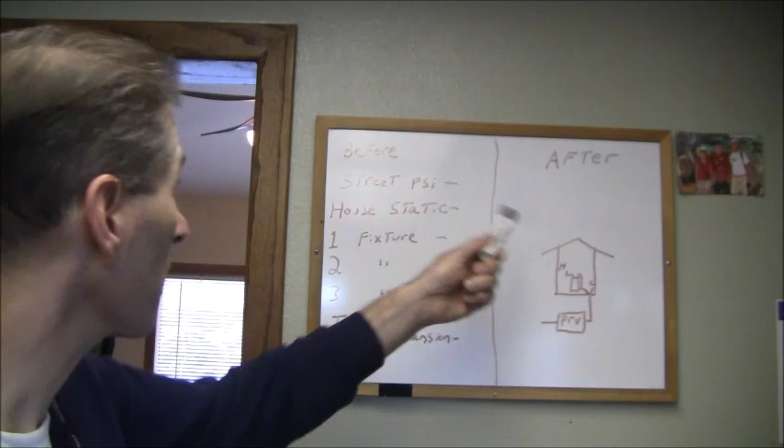Let me write this down. I'm going to do a board example here and go over the numbers. From the street, let's say this is 110 psi, and after that, going into the house, let's put in 50 psi for our example. So it's going to knock it down about half. The pressure reducing valve is going to knock it down about half.

So that's the first job of the pressure reducing valve - to knock down the pressure from the street pressure to what you want your house pressure to be at, and you can control that by adjusting the stem on the pressure reducing valve. That's the first action.

The second item that the pressure reducing valve does, depending upon the design, but I believe all or most of them have it, is what's called thermal expansion. Thermal expansion is when you take your incoming known pressure - street pressure of 110 psi - you go through your pressure reducing valve and it goes to 50 psi.

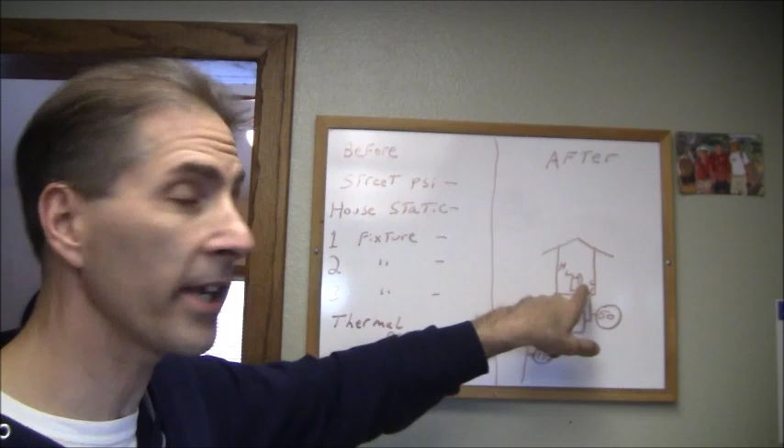Then, when you use the water within the house, you take a nice hot shower - perfect example. You deplete the water in your water heater, then you're done with your shower and shut off the hot and cold. Now all the water in the house is in a static condition - there's zero flow.

But you've depleted your hot water heater, and the thermostat has recognized that the temperature is now too low. The hot water heater, whether electric or natural gas, is now going to come on and heat up that water until the thermostat is satisfied - let's say 120 degrees Fahrenheit.

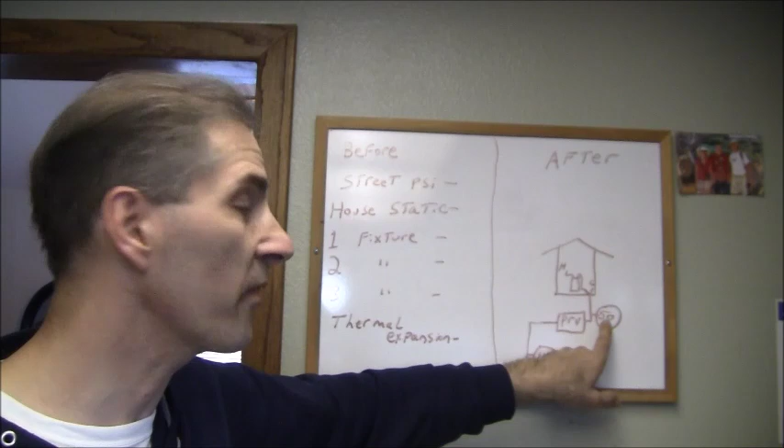But you have a pressure reducing valve and a closed system, you're in a static state. Water is non-compressible, so by heating the water in the hot water heater, you are thermally expanding the water pressure within this side of the house. So instead of 50 psi, that pressure is going to go up depending upon the size of your hot water heater and whether or not you have an expansion tank installed. So depending upon the accessories of your system, that will determine how the thermal expansion pressure is realized.

Now, in the drawing behind me here, I've got a before and an after. I'm in the process of changing out my pressure reducing valve, but I haven't changed it out yet. So I'm going to go through the steps of how I did my troubleshooting, and then I'll show you the numbers before and after, what the difference makes.

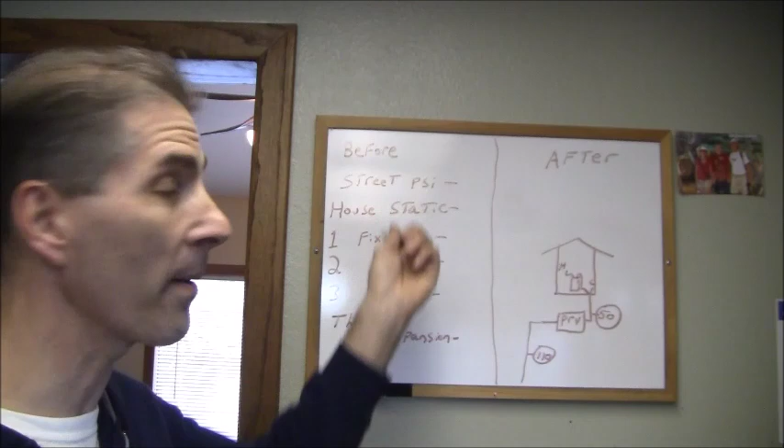And then me, as the homeowner, will be able to see how the water in the house is different than the way I've been living with it for years. So anyways, I'm just trying to get the system to 100%, and I want to see how much difference it's actually going to make. There's several numbers here that I want to get.

On that thermal expansion, I don't know if I explained that correctly, so let me go back to that one moment. When you shut your shower off and you've got this pressure reducing valve set at 50, when you shut the shower off, that pressure can come up to 100 psi or 150 psi or even more.

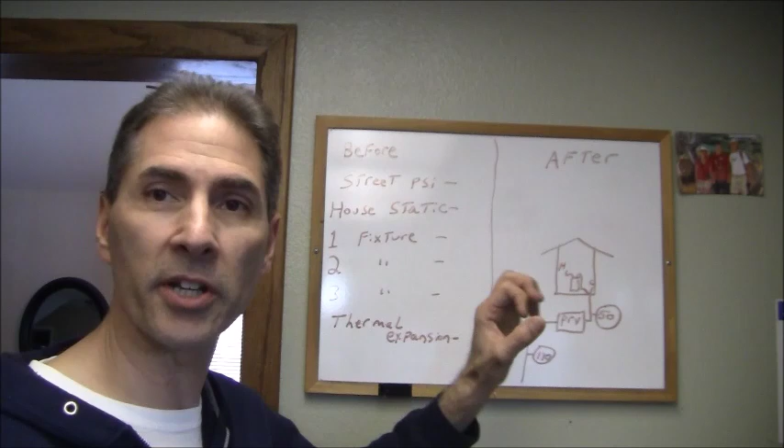Now on my hot water heater, there's, on all hot water heaters you're supposed to have this, which is a pressure temperature relief valve. If the pressure or the temperature, I believe the pressure is set at 150 psi and temperature at 210 degrees Fahrenheit, if memory serves me correctly. Once those are reached, the pressure temperature relief valve will open and dissipate that pressure so it doesn't exceed it, so your hot water heater isn't at risk of blowing up like a bomb. That's the way that works.

So depending upon how much thermal expansion you've got going on in your system, it's possible that you could pop that pressure temperature relief valve and have water coming out of there because of thermal expansion.

You may have a hot water expansion tank. It's supposed to be located on the cold water side right here. You might have a tank that comes down here, and that would be a hot water expansion tank. Maybe the diaphragm in that has failed, and your pressure temperature relief valve used to not drip and leak on you, and now it is, and you're wondering what happened. Maybe the diaphragm inside there has failed.

So we'll go through testing that out and all that.

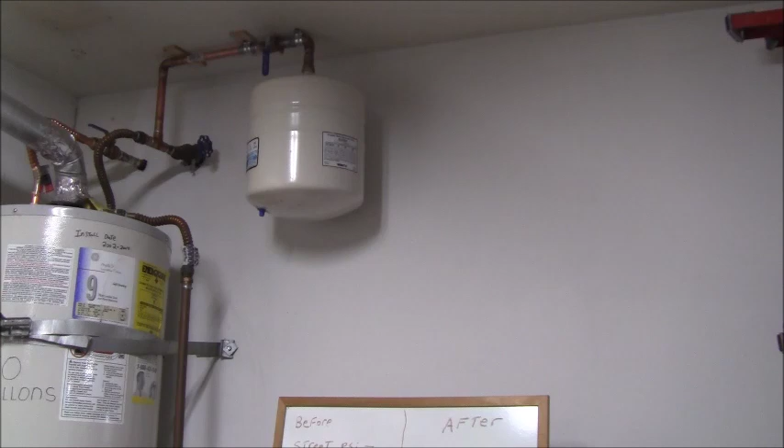Alright, so I took you into the garage, and there's my natural gas hot water heater behind me. There is a thermal expansion tank that I installed right there. Now if you look at it, I've got it valved off, and I have it valved off for a reason. There's the valve that I installed, and you can see it's off, so you know it's not in service at this time, but it's ready to be put in service.

Now the reason why I have it valved off is because my pressure reducing valve is completely shot. I'm going to show you how I determined that right now.

So I want to start filling in this chart with before and afters on everything. Okay, another thing that I want to talk about is how I determined what was the correct pressure in order to set up my system with.

So some of the resources that I use is this, I have several books here: Big Book of Home How-To, Stanley Complete Baths, and Home Improvement 1, 2, 3 by the Home Depot. All three of these books do not tell you what pressure you should have inside your house.

So here I am, I did a Google search, and the search was 'proper house water pressure,' and it populates with this information: the typical inlet water pressure to a home is 40 to 45 psi normally, and should not exceed 60. The pressure regulator is usually preset to 50 psi, however it can be adjusted anywhere from 25 to 75 with a simple turn of a screw, as shown. Okay, so that's talking about the pressure regulator.

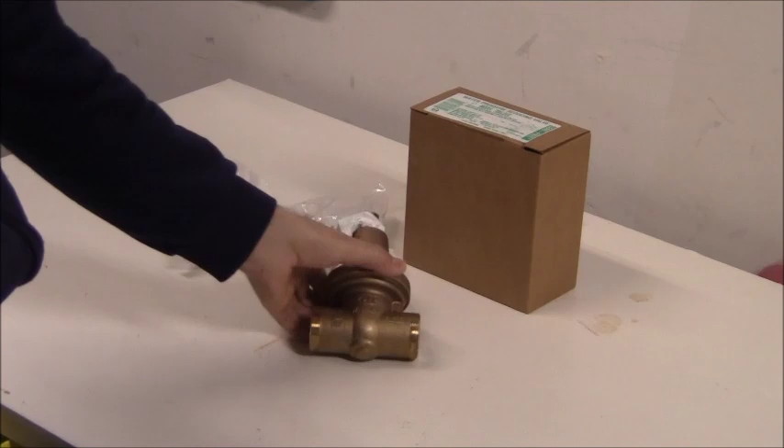Now let me show you the pressure regulator that I purchased. Here's the valve I purchased to replace my existing valve. I got it at Home Depot for $111. Here is the actual valve right here on my workbench, and this is what it looks like. This particular one is double unioned, unioned on both ends, which is really nice for taking it off and putting it on. There's the model number right there, 70XLDUC. So anyways, that's the valve I'm going to be installing and working with once I put it in my system. And there it is on the Home Depot website. I actually did buy it from Home Depot for exactly that price, $111.81, and I'm going to be sweating it in, so copper sweat is how it's going to be connected.

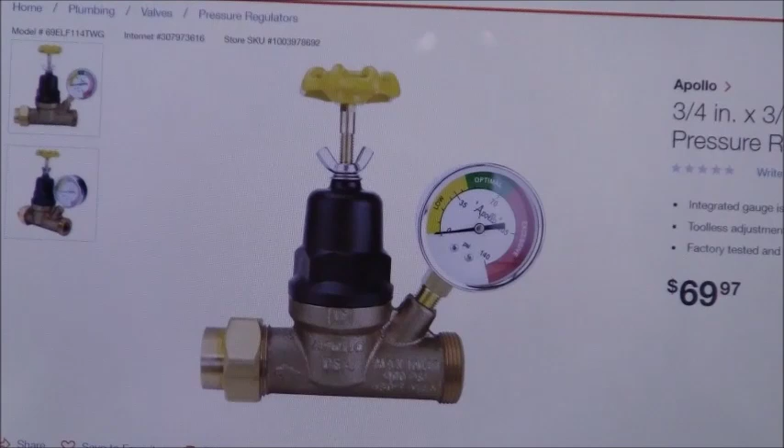Now, one thing while I was searching for valves, here's a valve I did consider purchasing. I thought it was kind of neat looking. This is an Apollo valve, but you cannot get this particular valve in 1 inch, and if you'll notice, it's not double unioned, it's only single unioned on one side. The thing I like about this is look at that pressure gauge built into the valve, which is kind of nice, and it tells you the green zone. Let me get this camera exactly right. So it tells you the green zone is somewhere between about 45 psi and 75 psi, and this is meant for residential use.

This is a valve meant for residential use. If you look at the valve writing, pressure reducing valve with gauge and so forth, but it's meant for a home. It's a pressure reducing valve for a home.

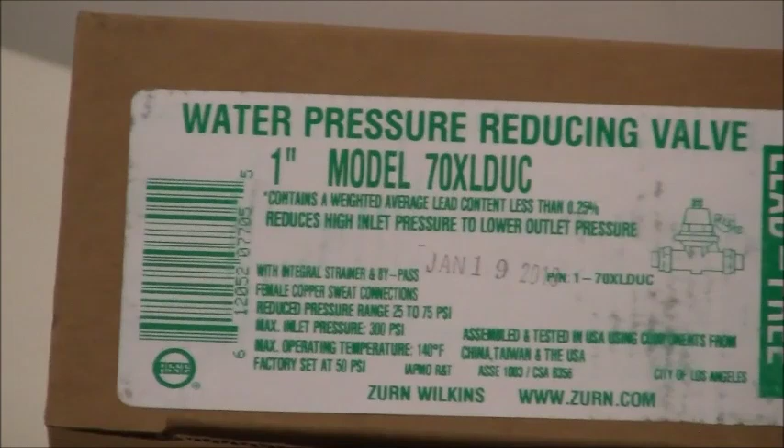I had considered that, but the valve I purchased is actually 1 inch because I'm dealing with a 1 inch line and I wanted to stay with 1 inch to give me the maximum water flow possible. So that's why I went with that.

Now here's one of the tools I am using to determine what my system is doing. This here is a pressure gauge. There is the model number to that pressure gauge right there. Hold on, come on camera so you can see that. And this is what it looks like. I did purchase this at the Home Depot for like $15.

The thing that it has is this resettable handle. Hold on, let me get a better picture. Okay, so what it has is this resettable handle. You turn that and set it down to 0 or whatever. When the pressure comes up and then comes back down, this will tell you where it ends up resting, to tell you what your highest pressure is, to tell you exactly what's going on.

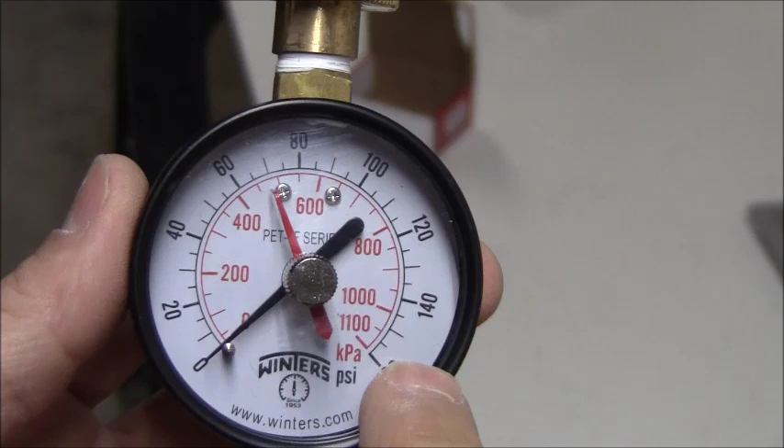I started off with the cheap one, a $10 pressure gauge, and that thing was so poor quality that I returned it immediately. This one cost me 15 bucks, but it's much higher quality. This quality is acceptable, and I can live with it. This is the quality that I want.

So now I'm going to fill in my chart. The first thing I want to do is put the pressure gauge on, and we want to figure out the street pressure, house static pressure, and then running water through plumbing fixtures. I got 1 fixture on, 2 fixtures on, 3 fixtures on, and then what the thermal expansion pressure is. Let's go through the whole thing right now.

Okay, so here we are on the outside of the house. This is the section I'm going to be redoing. What's happening is the water comes in from the street here, goes through one main shutoff valve, which is the old gate style valve here. Then it tees off, and it goes from 1 inch, and it tees off to 3/4 of an inch.

It goes through a 3/4 inch ball valve here, changes over to PVC, and then that goes to the irrigation system. Here it comes up, it goes through the pressure reducing valve that is no longer functioning properly, comes up, has a hose bib valve here, and then it goes into the house here at 1 inch.

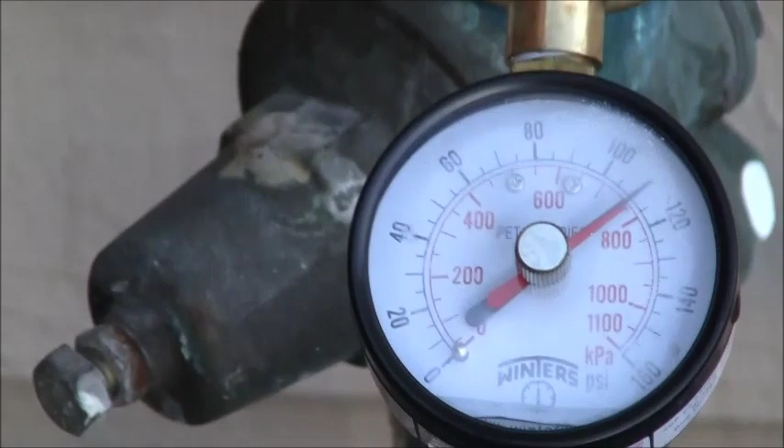Okay, so you can see that I've got my gauge on there, and you can see exactly what the pressure is. I've already got that valve opened up, and there is your pressure, which let's just call it 110 psi.

Now, on my particular situation, what I'm going to do now is, I'll tell you what I'm going to do. I'll open up the cold water faucet on the downstairs sink.

Okay, so right now I'm running the cold water on one faucet, and you see that I dropped down to 65 psi. Now I'm going to open up a second, there's a tub downstairs. I'm going to open that up.

Okay, with the tub on now, it dropped down to just like 62 psi. Now I'm going to flush a toilet. Alright, now I'm flushing a toilet, and it's pretty much staying right at 60 psi with 3 fixtures on. So it went from pretty much 65 to 62 to 60.

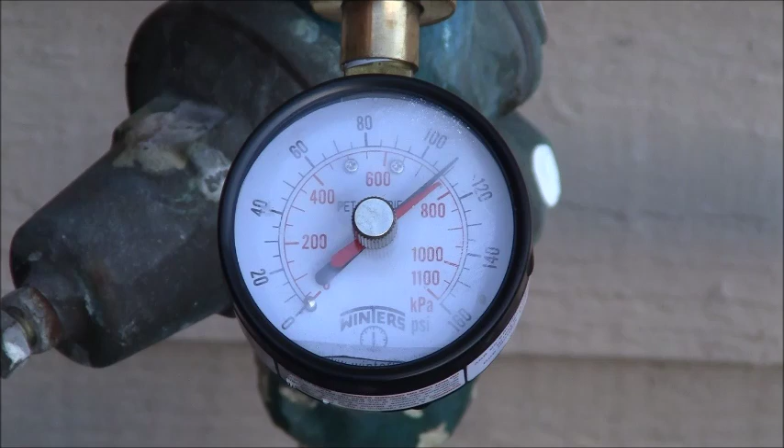Now I'm going to shut off those 3 fixtures. Okay, I've shut off the 3 fixtures and I put the hot water heater in vacation mode, so there's no way that that can be thermal expansion. So right now the house static pressure is at 110 psi.

Now what we want to do is figure out what the thermal expansion pressure is going to be. So we need to get the hot water heater going.

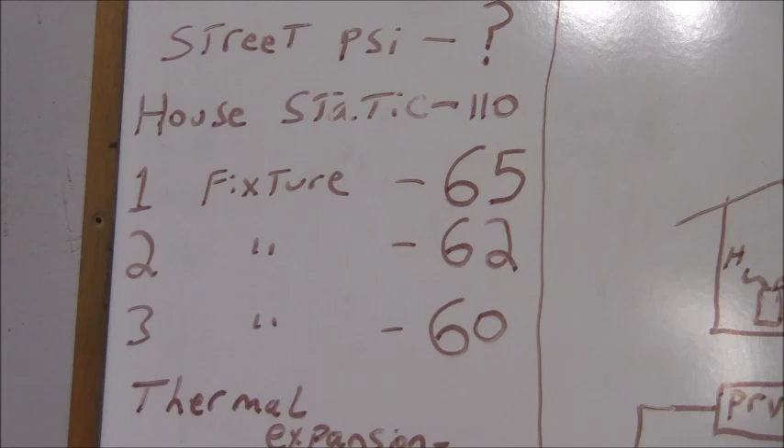Alright, so here's our chart so far. Street pressure, I put a question mark because I don't have a tap before the street pressure. The house static pressure is 110 psi, which I'm assuming is street pressure, by the way. With 1 fixture on, we saw 65 psi, 2 fixtures was 62, and 3 fixtures was 60. Thermal expansion, that's what I'm after right now, is the thermal expansion pressure.

I still have the valve here off, and I have my hot water heater on vacation mode. So what I want to do now is jack that up and get that going.

Alright, I got it all the way on hot, but it hasn't kicked on yet. I'm going to run some hot water to try to deplete the tank.

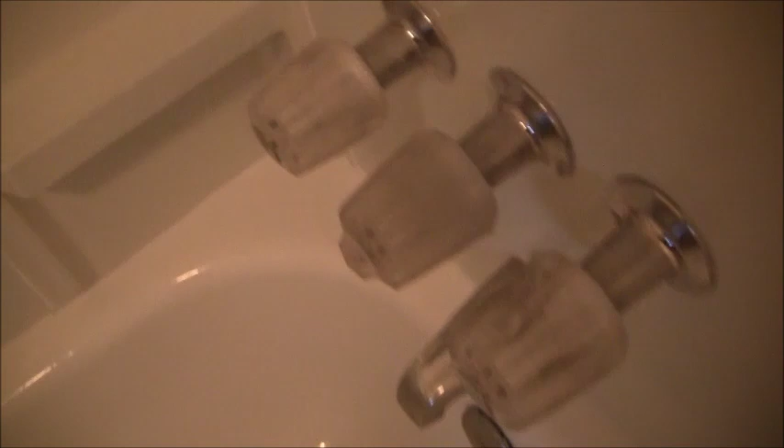Alright, so here I'm going to open up the hot water valve. That water there is going to be good and hot, and we want to get this hot water heater to fire off. Normally I set that right on hot. I'm going to leave that on hot. And let's see if we can get this thing going.

I don't know if I'll be able to see it or not. Let me see if I can see the pilot. This particular one is a pilot system. I can't even see that. Hold on - I shut the camera off and 2 seconds later it turned on.

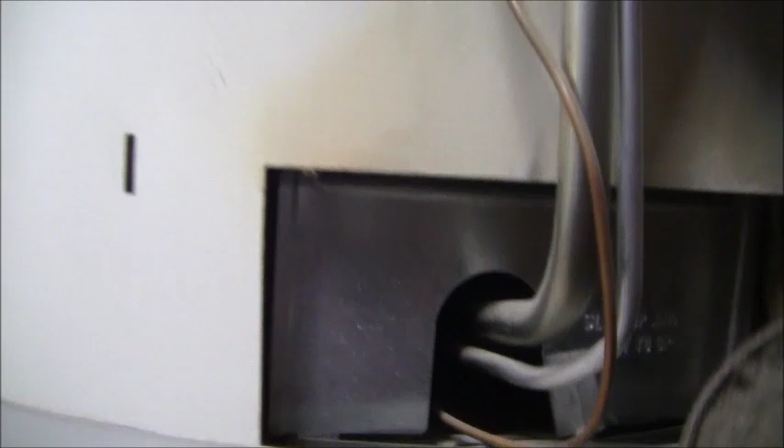Alright, let me shut off the hot water so that way... Alright, I'm going to shut this valve off. There we go. And now we don't need that. So what I'm going to do now is, the hot water heater, we're in a static condition. The hot water heater is on. Now I'm going to wait till that thermostat gets satisfied, and I'm going to see what the pressure is outside.

Alright, I've instructed everybody in the house not to use any water, and the flame is still on, and I'm just waiting for the thermostat to get satisfied, so this way all the thermal expansion will have taken place.

Let's go outside and see what the gauge is doing now while it's fired up. Alright, so you can see that I am just about, well, maybe 112 psi on this gauge with the hot water heater fired off. So what's happening is the thermal expansion feature of the pressure reducing valve, which is right there behind it.

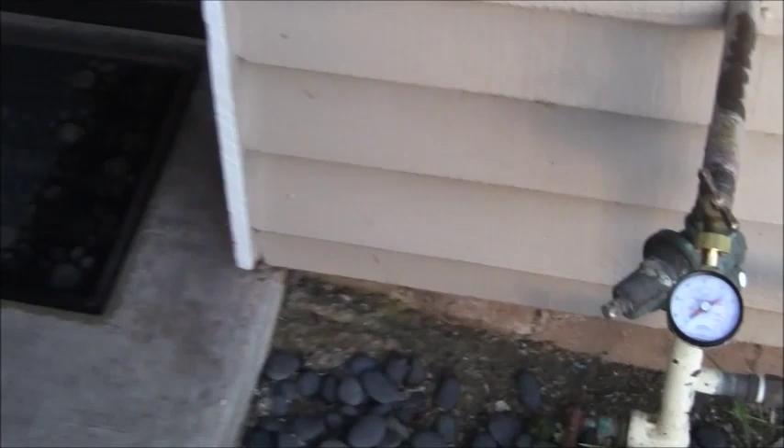Oh, hey there. Do you want to say anything? Hi. Alright, thank you.

So the thermal expansion feature of the valve is, what it's doing is it's bypassing the valve, allowing that pressure that's building up in the system due to thermal expansion to go back into the street. So let's just hypothetically say that the street pressure is 109 psi. Then what's happening is that about 2 to 3 psi over that is when the valve is bypassing and allowing that excess pressure to go back into the street.

Let's see if the hot water heater has backed off. You can see that, see where that red is? You can see that that's already backed off. The needle is backed off slightly from where the red is. The hot water heater may be satisfied now.

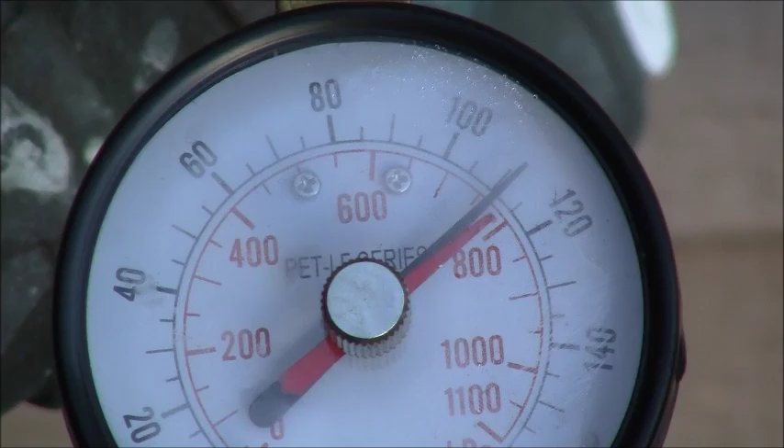No, we're still fired off here. I'm still waiting for this thing to get satisfied. Gotta wait a little bit longer. I want to see it through right till the very end.

Okay, the hot water heater's still fired off. Well, since it's fired off and I've got a few minutes to kill, what I'm going to do is just check the draft on this. Let me fire this thing off here, hold on.

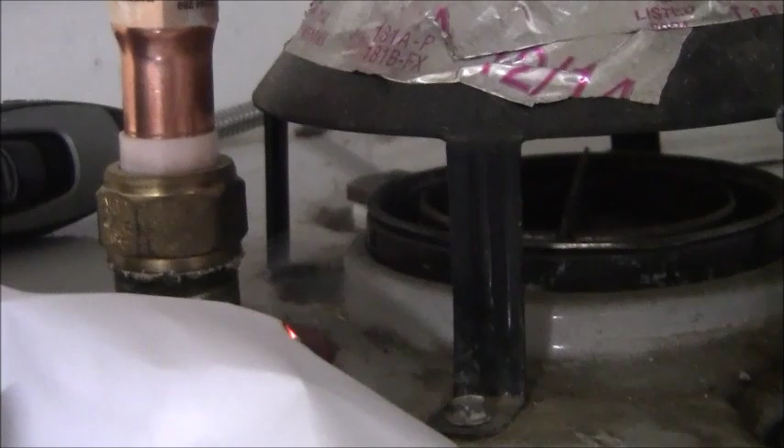So what I'm doing is I'm creating a little bit of fire, a little bit of smoke here, and then I'm taking this and putting it here to see if it gets sucked into the draft. Not as well as I'd like. It is drafting in, I wish it was a little bit better. Let me just try that again.

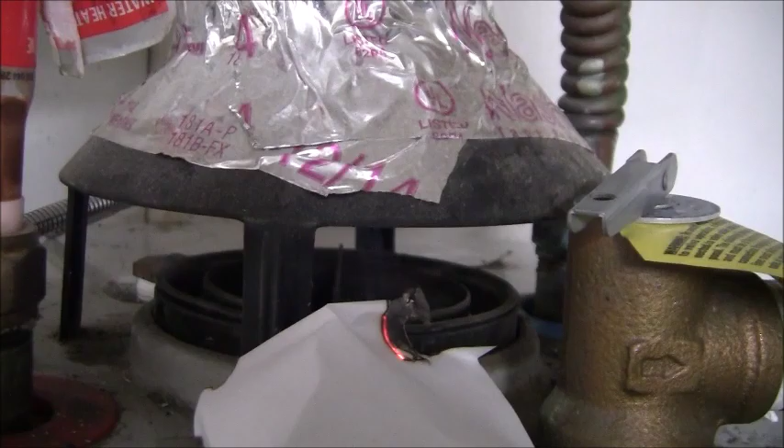So I create some smoke, put the smoke right near it. Yeah, it's drafting in, it's not the strongest draft, but not strong at all - some of it's actually coming out. When it's directly underneath, it does seem to go right in, but when I had it out here a little bit, it's not strong enough to draft it in. So there is a draft, it's just not a strong draft.

The pipe here is a vent pipe. I did not install this, so I'm just assuming that it is the correct size. Let's see here, yeah, looking at the top tail piece here - actually I'm not sure the exact name of this piece - it does appear to be the correct pipe diameter coming out of this, and it is pitched up, so it's not like there's negative pitch on the pipe, and then it goes up to the roof and out from there.

So anyways, just while I'm waiting for this thing to get satisfied, I was a little bored, so I thought, well, I might as well just go ahead and check the draft while I'm up here.

One other thing I did, you can see this pipe is fairly new here. This one on the hot water side, you know it's hot because of the color red. The other one's blue, which is cold. And I installed a valve on that side of the system. So I actually have valves on both sides, the cold water side, hot water side, and then a separate valve going to this expansion tank.

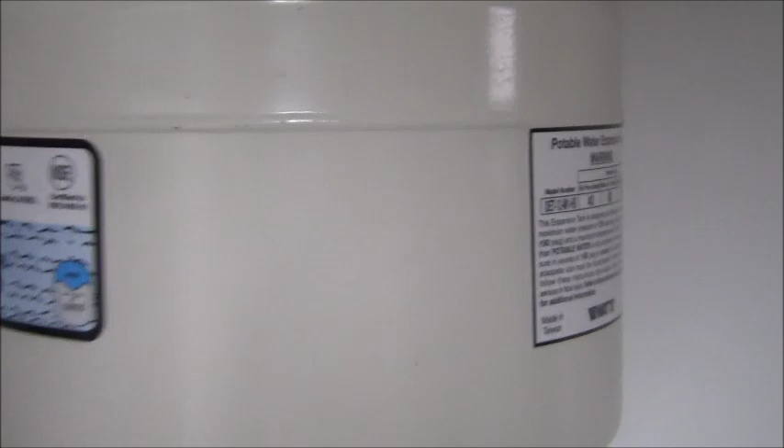This is a Watts tank, and there's some pressures here for this particular tank. There's the model number of the tank, and the air pre-charge pressure was 40, max air charge is 80, and so forth.

Okay, so that is everything to do with that, and I'm still waiting for this thing to get satisfied so I can check my thermal expansion. I'll see what the pressure is outside.

There's your pressure, still not really doing anything. It's about 110 psi, 111 psi. So there was a little bit of a spike there. You can see my red where it came up to, oh, let's just call it 117, and then it backed off and it's not going any higher.

Maybe the street pressure backed off at this time, and that's why it doesn't require as much pressure, because I believe the way the thermal expansion works on this pressure reducing valve is that it's about 2 to 3 psi over street pressure. So it's possible the street pressure was up at one point in time, and that is what did that. So I don't think we're going to go any higher, but I want to wait till the thermostat is satisfied.

Okay, the thermostat is satisfied, flame is off. Let's go check pressure outside.

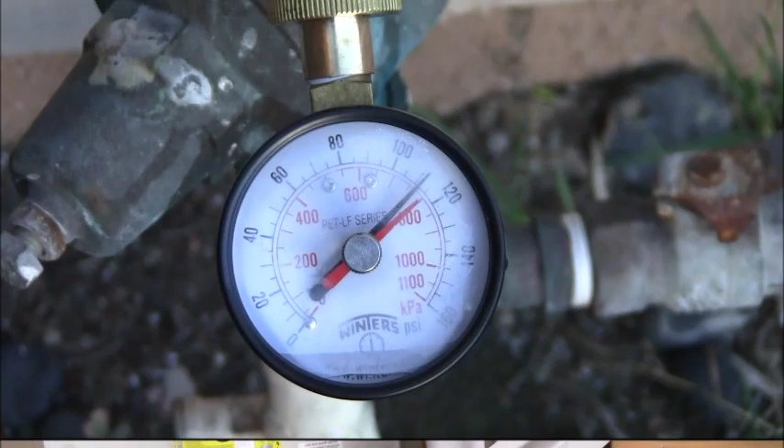Alright, there you go. Pressure is about 110 psi, but I'm going to call that a high of... it's a little hard to read it, what that is. Hold on. I'm going to call that 115. 115 psi thermal expansion. Okay, so here's our chart filled out.

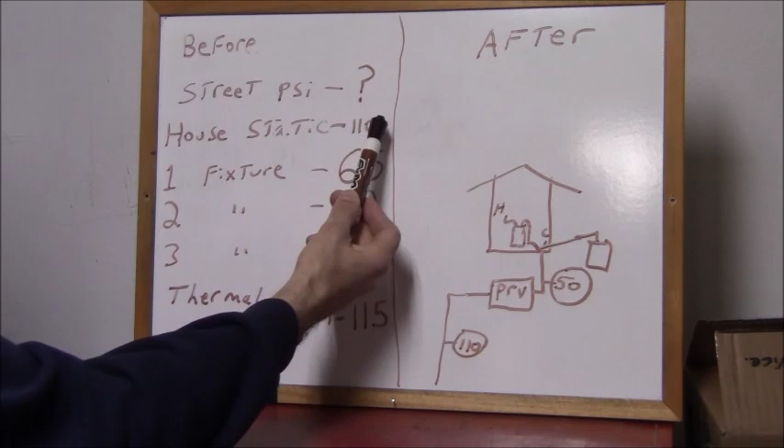And you'll see that what I've got here, I'm going to assume the street pressure is 110 psi or thereabouts, between 110 and 115. Let's just call it 110. With one fixture on, now I'm running water 65, 62, and 60, and thermal expansion is approximately 115 psi. Of course, this depends on what the city is providing, because this is going to go 2 to 3 psi over whatever the street pressure is.

Now, even with me changing out the pressure reducing valve, what do I expect to accomplish? Well, number one, the pressure that I'm planning on setting my pressure to is actually, I'm thinking about going with 60 psi, and let me explain why. The reason is because right now you'll see that the way the pressure comes in, the water comes in, and then it goes over to here, and then it goes to the irrigation. So my irrigation is getting a pressure of 110 psi.

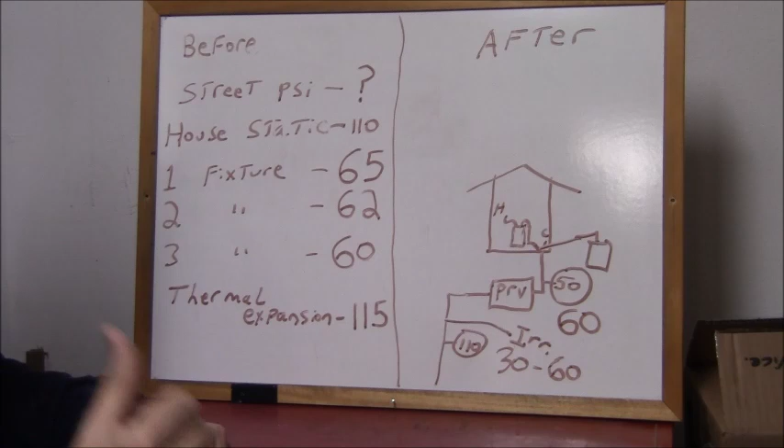The irrigation, from the research that I've done, should get a pressure somewhere between, well, let's just call it, I'll tell you what, let's just call it like this, 30 to 60. That's what it should be. Here's my problem. On one of my zones, I have 6 zones. One of the zones has a large number of heads, and I'm afraid that it's not going to work properly at 30, so I got a feeling I'm going to need the 60.

What I'll do is I'll start out at 50, I'll see if it works fine, and then if not, I can always increase it to 60. So I'll go for 50 psi as my starting pressure. So if I do this correctly, and if this valve is working properly, my expectation is that I'm going to have 50.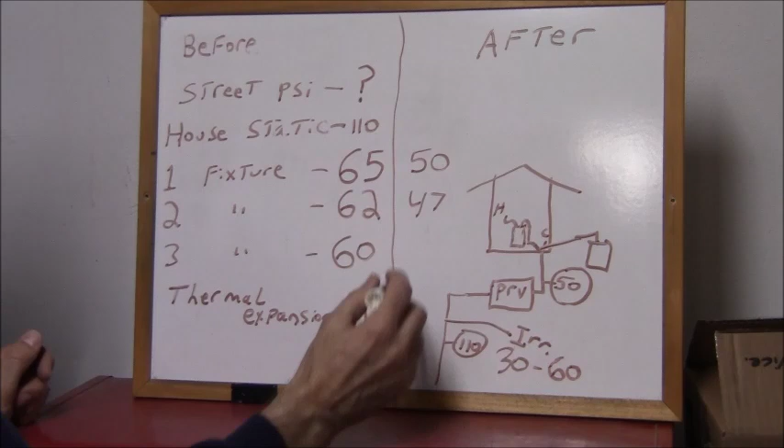With the second fixture on, it'll go to about 47. With the third fixture on, it'll go to about 45 psi. So this isn't really going to drastically change with water flowing. It's going to be approximately the same.

Now, my house static pressure, I expect that to be at 50 psi. Thermal expansion, because I'm going to be introducing this tank into the equation, I expect the thermal expansion to be approximately, let's just say 53 psi. And at that point in time, I'll know what my street pressure is, but I'm going to guess and say it's 110.

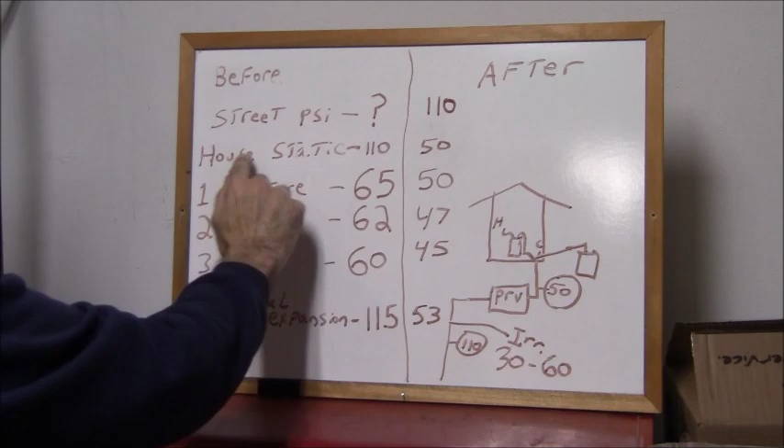The only thing I'm really accomplishing by doing this valve change out for the pressure reducing valve is taking my house static pressure from 110 down to 50, which is good, cutting it in half, and taking my thermal expansion from 115 down to 53, which again is good. The house will experience lower pressures than it's at now, and I'll have control over this because the PRV will be working.

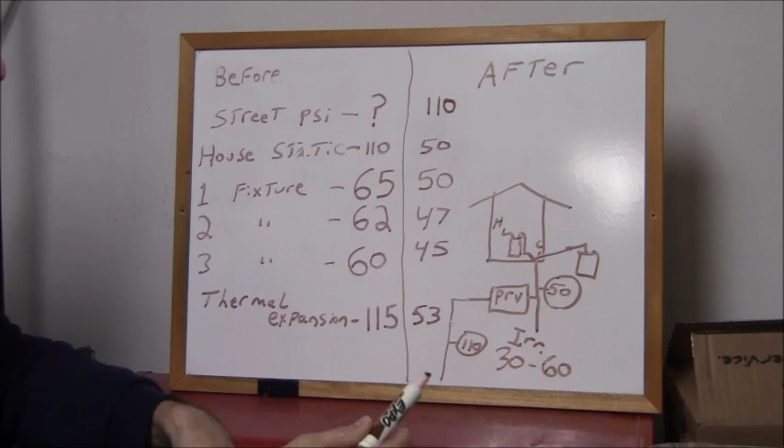I'm repiping this so the irrigation is no longer on this side, I'm taking the irrigation off of this side. The PRV that feeds the house is also going to feed the irrigation. So the irrigation was receiving 110 psi on the inlet, and now it's going to receive 50 psi. So this is the changes I'm going to be making in the system.

These changes are certainly not inexpensive. The valve was $100. The tank, I think, was $63. The copper, to do the whole job, I probably spent at least $250 on, at least $200. So this whole job is costing me, just in materials, at least $350 to accomplish this goal, not to mention my labor and the research to make sure I'm doing everything appropriately.

Once I do the change to the new system, we'll go through and do the same test, and we'll get the real numbers. I'm just telling you what my expectation is, and my reasons behind it, and why I'm doing it.

I've been living in this house for 7 years, and that pressure reducing valve has been in the same condition for the same 7 years. I'm sure it was failed the day I moved in, and we just used the water in the house like a normal house, no difference.

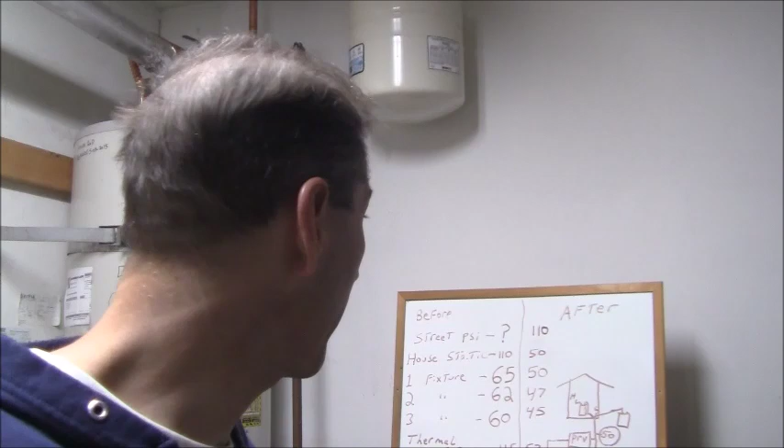On the irrigation system in the back of the house, I have a drip on one of the zones. It goes through a pressure reducing valve and then into a drip system. I think on the downstream side of that, after the pressure reducing valve, the half-inch black plastic tubing just burst. This is definitely going to help that too. But that only happened to me once, and I patched it up, and it's still working.

It's just the items this house has experienced. And one other thing, this particular house is in Orange County, California, and everybody in this neighborhood, when they built these houses, took the copper water supply coming in and ran copper lines in the slab of the home. My home is the same thing, it's got some copper in the slab.

This area is called Orange County because all they grew was orange trees. The ground is extremely acidic, and that acidity, along with the age of the house and everything, has caused plumbing problems. The plumbing fails in the slab a lot of times, and then you have a slab leak, and depending on where that's located, it's a huge issue depending on the break, when you find it, how bad it is. Some people can have $20,000 worth of damage as a result.

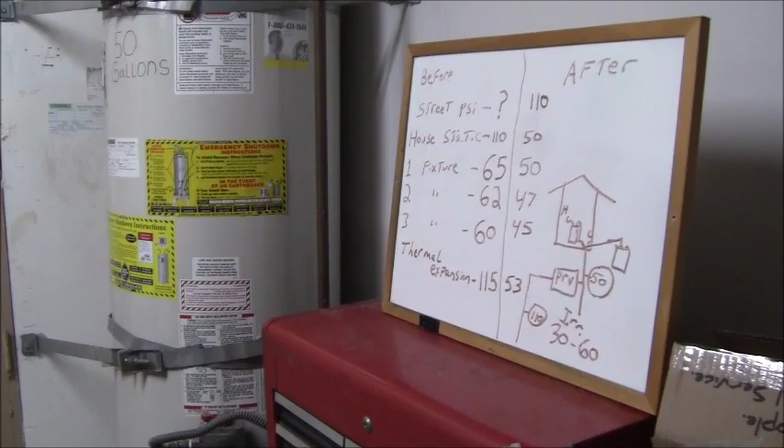So technically I wouldn't kill the diaphragm in that tank, but the thermal expansion wouldn't be working properly — it would just be going out the bypass, out the pressure reducing valve. So it's not really beneficial for me, with a malfunctioning pressure reducing valve, to put that tank in service right now, because my PRV is shot and these are my pressures.

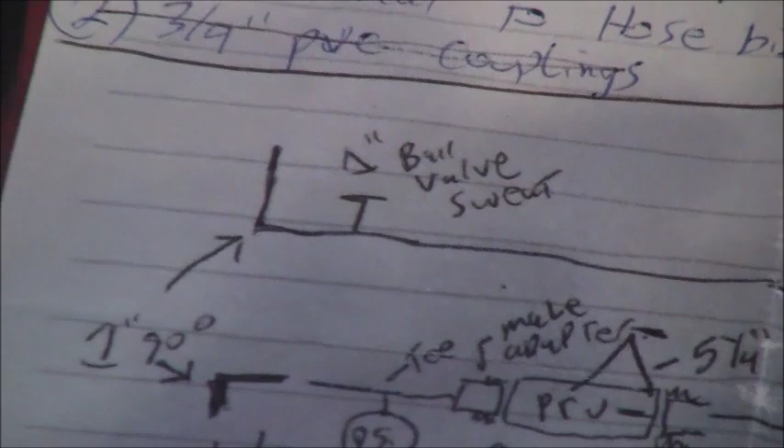Okay, so what I did was I drew out the existing system and what it looked like, where everything was located, and went through that. Then I drew out exactly the system that I wanted to design, and now what I've done is I've pretty much just laid it out here on this workbench.

So what I'm going to do is take the incoming 1-inch line. I've got a ball valve here with a bleed port, which I'll install on the house side of this system. Make a 90-degree bend, go through a T-fitting 1-inch to half-inch, and there's a half-inch valve here where I can install this gauge, so I'll be able to determine exactly what the street pressure is and what the high of the day is. That's the benefit of putting a tap in before the PRV.

Then the PRV, then I'm going to put in another T, 1-inch, half-inch valve to hose bib. And then I have another gauge here so I can determine what the pressure differential is and make sure I'm getting the right pressure going into the residence.

Then I'm going to come over to this T, 1-inch to 3/4, and then I have a 3/4 inch to male, sweat-to-male adapter. And that ball valve that's on the system now is going to go right here to the irrigation.

We're going to come from this 1-inch up to this 90-degree 1-inch. I was considering putting in this T — I've got a 1-inch T — but I don't think I need it at all, because this is a double union right here, and since that's a double union, it's going to be so easy to work on and change out this valve. I don't even think I need an additional union in this pipe here at all, so I'm not even going to put it in.

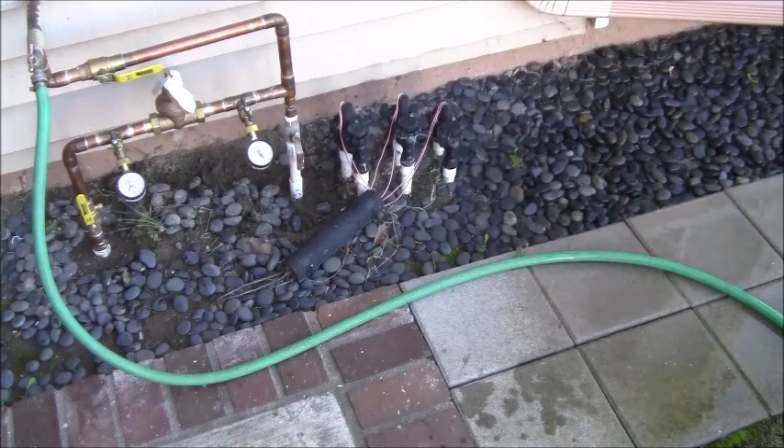Okay, I've got a hose attached with the spray nozzle right here. Just to show you an example, I'm going to shoot that while you're looking at the gauge, to show you how it fluctuates. Let me zoom in so you can see it real tight. Okay, so here I am.

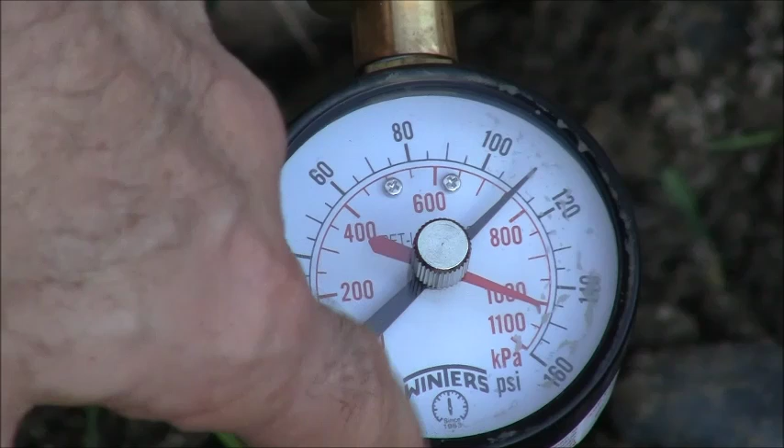You can probably hear the valve in the background, but see how it bounces around? That's why that red needle, even if I reset it to where it's at, if I bounce this water around and cycle that, it keeps pushing it over. I've been leaving this on for like a week, and sometimes I've seen it as high as all the way down here. Now that goes up to 160, so at some points during the evening it bounces all the way over 160 psi. Alright, so that's the house street pressure.

Then we go through our brand new pressure reducing valve, and then we come over here and have house pressure. Now on the house pressure, I currently have it set at about 70 psi. I had it set originally at 60 psi, and I was trying that, and I was having a problem with one of my irrigation zones, well, two of my zones, and I'll show you those in a second.

After that tap, we come down and go through this 3/4 inch ball valve which goes to the irrigation, and then we tee off and come up 1 inch, across, and then there's a shut-off valve right there—you can't quite notice it in that picture. But right there I've got a bleed valve on this side of the system, so if I want to shut this and bleed it down, I can.

Alright, so with this system it allows me to do several things. I can shut this valve off here—that'll shut off everything, the irrigation and the house. I can shut off this valve right here, which just shuts off the irrigation. Or I can shut off this valve right here to shut off just the house and leave the irrigation on, for when I'm on vacation. That's the purpose for this valve.

So with the way that I did this, I now know all my pressures—I know my street pressure and my house pressure. That is why I designed and installed it the way that I did.

When you do this type of work and have your irrigation tapped off the same system, you want to make sure that your anti-siphon valve—this portion of the irrigation valve right here—is a minimum of 6 inches from the highest sprinkler head. This particular one is the lowest of the three; I wouldn't mind redoing this and bringing it up between 6 and 12 inches, way up here. So if you replace these valves, don't keep them low to the ground—get them up so the anti-siphon valve is between 6 and 12 inches above the highest sprinkler head.

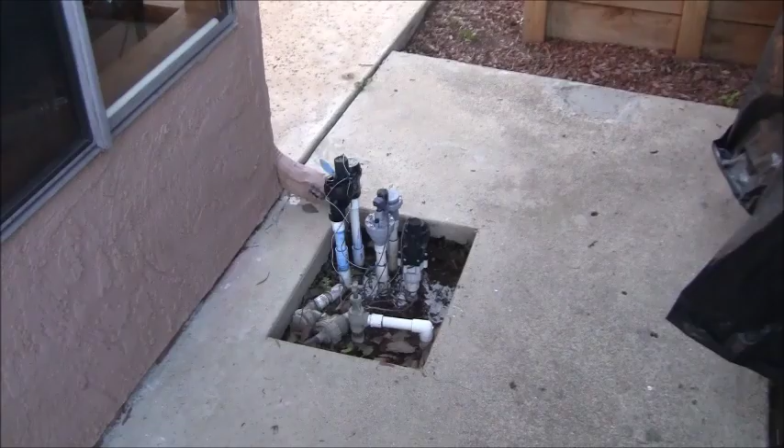Now I'm going to show you the other irrigation zone that I've got. On this side of the house, I'm using a drip irrigation system. You can see I've got these agapanthus and pygmy palm trees here. So let me show you what I'm talking about. Inside here is a drip irrigation system where I've got these sprinkler heads.

Before, this pressure used to be city pressure. When you took this cap off, it was shooting out of there at 110 psi, and sometimes I'd even lose these caps. But at 60 psi, this is the end of the run, by the way, when I went to put this on, it was just a dribble.

Right now I've got it at, even at 70 psi, I really don't want to go any less than that. So that's still going to be enough to irrigate this. There's two reasons why I went to 70 psi: this zone, which is zone 4, and zone 6, which is that one in the back with the 18 heads.

Now zone 6, that particular zone should be rezoned. Technically what I should do is dig that up and break it into two zones. If I did that, I could probably drop my PRV valve back down to 60 for that zone and be okay. I'd still be weak over here unless I possibly divided this drip irrigation zone up into two zones as well. But I'm just going to leave it at 70.

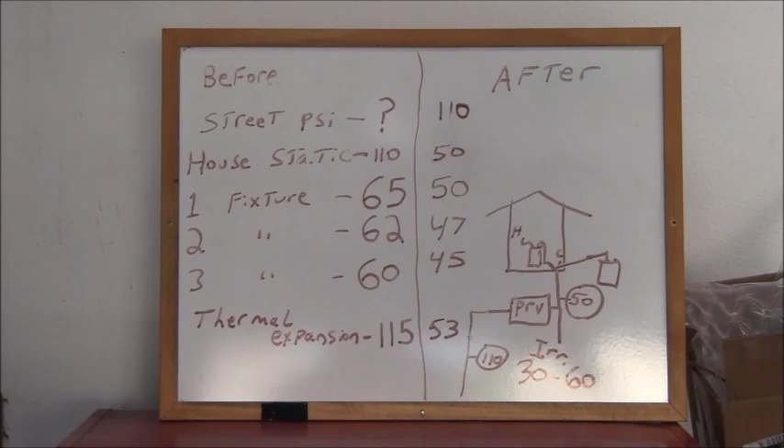Okay, here are my numbers that I did for my test. This column here is my guess numbers, and these numbers here are the actual numbers. The street pressure coming into the house is 110 psi. The house static pressure, I originally had it set for 60 psi, but I raised it to 73 because of that irrigation zone in the back being a little weak. I tried to get it to 70, but it kind of rested out about 73. When I did my flow tests with one fixture on, we started on the before at 65. I got it actually up to 70 now with one fixture running.

With 2 fixtures running it was 62, now it's 66, and with 3 fixtures running it was 60, now it's 65. So from the house perspective, the pressures increased by about 5 psi.

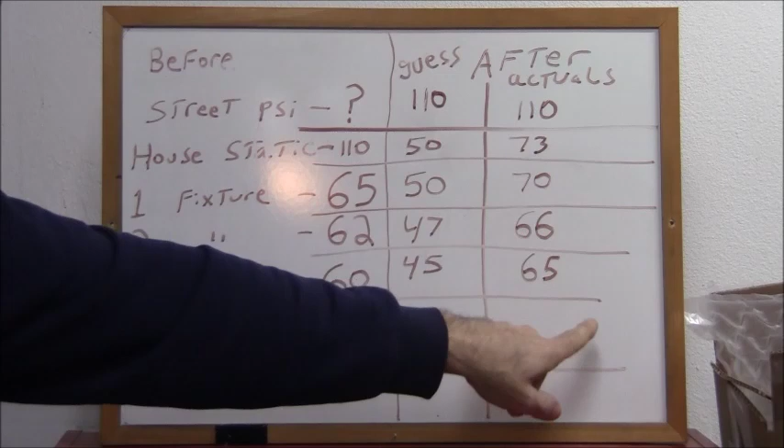Now, I have not done the thermal expansion yet, so we still have to do that.

After I changed out the regulator, my first pressure setting was 60 psi, and the house operated just fine at 60 psi. That back irrigation zone, the one with 18 sprinkler heads, out of all the zones I have, was the only one that did not operate properly.

And that's really a design flaw in the irrigation sprinkler system. If that system had been designed properly, and you had not exceeded, let's say, 10 heads in one zone, then everything—the house and the irrigation—would have all worked fine with 60 psi.

So here are my options. My first option is to redesign the irrigation sprinkler system so that I can irrigate that zone with 9 heads or something like that, and make sure I can irrigate the area with fewer heads. But I'd have to redesign that, so that's one option.

Another option is to repipe my inlet water supply so that I have one pressure reducing valve for the irrigation and one pressure reducing valve for the home. That's another option.

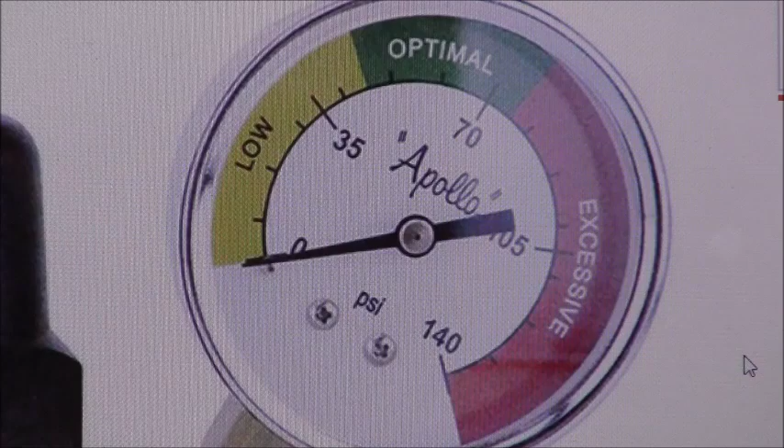But if you look at this valve here, which is one I was considering purchasing, and look at the pressure gauge built into it—this is an Apollo 3/4 inch lead-free bronze pressure reducing valve with gauge. If you look at that gauge, the green zone goes all the way up to 75 psi. Again, I tried to get mine around 70 and it crept up to about 73. So according to Apollo, I'm at the upper end of the range, but still green. That's using that reference source.

Now here's a book about home inspection—this is the Complete Guide to Home Inspection. When I open it up and look at water flows and pressures, it tells you that pressures between 40 and 80 psi are in the normal range. So using this home inspection book as a reference, it's telling me I can go all the way up to 80 psi. So those are different reference materials.

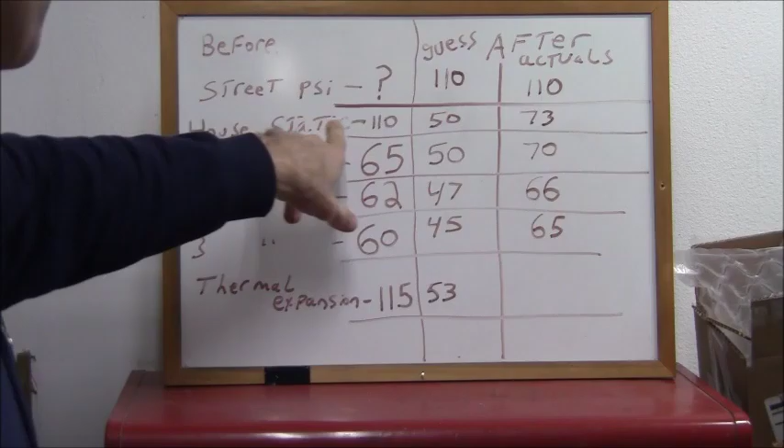Alright, so with that in mind, my house static pressure of 73 psi is towards the upper end. I don't necessarily want to go higher than that, but everything should still be okay. That's how I arrived at determining the pressure I wanted to live with.

The house would be just fine with 60 psi, like I said earlier, but because I want to see if I can irrigate that back zone without redesigning it, I increased the pressure to see if I could accommodate and make all worlds happy simultaneously. This is the easiest solution without spending any more money, time, energy, or resources to fix that back zone. So that's the reasoning behind all of that.

Now we need to check and do the thermal expansion—this is the last item I want to get into. There are a couple different thermal expansions. Number one, I've got thermal expansion right here in this tank, so that's one thing I can check. Number two, I want to check the new valve and verify that the thermal expansion bypass works on it. So we need to go through the entire situation.

The first thing I want to do is check my thermal expansion on this tank right here. I know my house static pressure is 73 psi. So first I want to get that tank to what's referred to as a zero static state, and verify that the pressure on this bottom port, which normally has this blue cap on it, is 73 psi. So the first thing I've got to do is get the water pressure off of that.

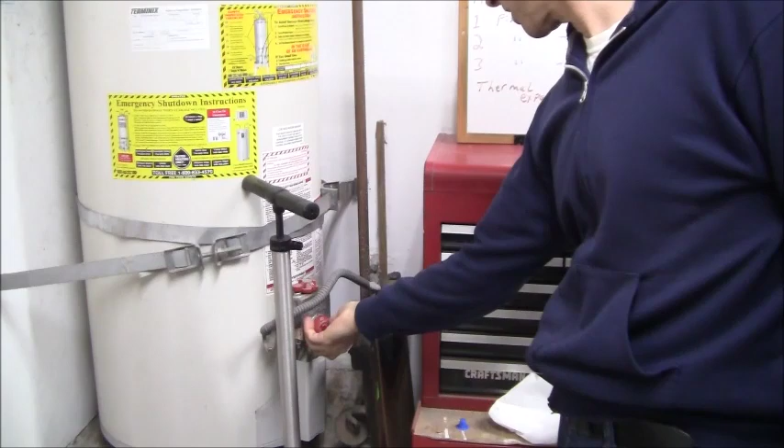First thing I'm going to do is shut off the inlet water supply. Oh, you know what? First I'll take the port here and make sure it doesn't fire off, and I'm just going to put it to vacation mode so I don't have to worry about the hot water heater firing off.

Next thing I'm going to do is shut that valve right there - this is the inlet water supply to the hot water heater. That's this one, I'm going to shut that off. That's going to kill the inlet water to the hot water heater. Okay, that's shut tight.

Now what I'm going to do is go to a sink and open up the hot water. Let's go do that right now. Okay, so here's a sink - when you're looking at a sink, the one on the right is cold, the one on the left is hot. I'm going to open that up. Now that pressure you're seeing right there is the pressure from that expansion tank, because all I have is the hot on.

Look at all that water. That's an enormous amount of water that would be coming out that bleed screw, which I don't want to happen. That's why I'm doing this - because I don't want to deal with all that pressure coming down my wall into my garage. Look at that, that's still running. Unbelievable, I can't believe how long this thing is running for. I almost get the impression that I didn't shut that shutoff valve tight, but I'm sure I did.

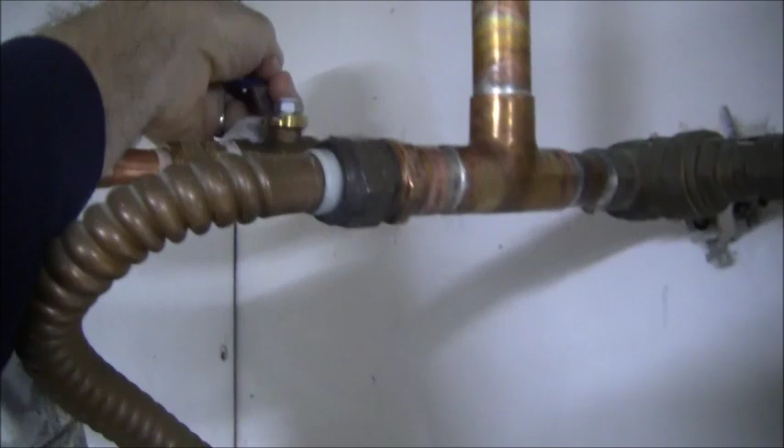So now let me show you what I'm going to do. Now shut that off, let's go back out to the garage. In my situation, I've got a tank outlet valve - I can shut that off. Boom. Now what I can do is take this poppet valve here and pop that to make sure there's no pressure there, and there is not.

Now I can open this up - okay, I started to get a little bit of water out the overflow. Now I just shut that. Now I can shut that right there, and now this is vented to the atmosphere. This tank right now has only atmospheric pressure on top of it because I've got this valve closed and my bleed screw opened, and I'm totally good to go.

I've now isolated this tank. So now what I can do is I've got a pressure gauge here, but this particular pressure gauge only goes up to 50 psi, which is for automotive tires. See if we can see that. It's kind of - anyways, this thing only goes up to 50, okay? So I know I want 73 psi.

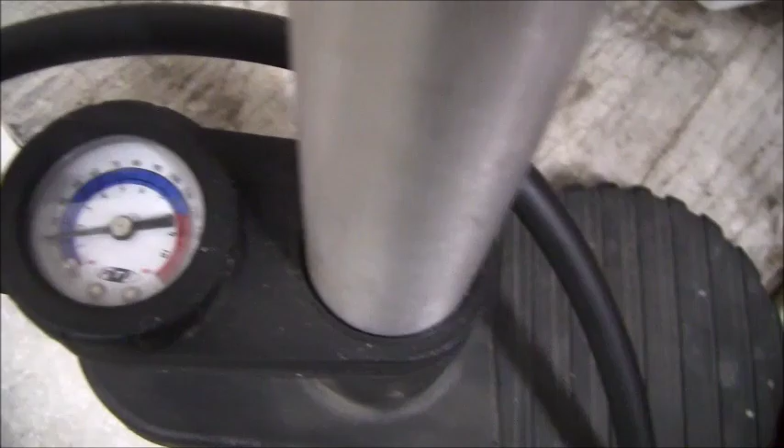So what I've got to do is use my bicycle tire pump - this particular gauge goes way up past 120, okay? So let me put this thing on the tripod. Let's take this, put this in here, open that up. And the pressure right now is 69 psi. So if I'm supposed to have this balanced at 73, technically I need to put 4 pounds in here. Alright, it's going to take me a second to do that.

What I'm going to have to do is start up my air compressor I've got under here and get some hoses and stuff. Alright, there's the pressure. Let's see if I can get it. Oh, come on.

Trying to show you that pressure. Anyways, it's just over 70 psi. The camera loses focus when it goes in too tight.

Now that we know we've got the correct pressure on the tank matching the system pressure, I'm going to shut that off. Let me dry this up a little bit and find my bleed screw. I hope I didn't lose that. Are you up here? Yes, you are. Alright, now I'll put the bleed screw back on here and tighten that up. Now I'm going to open this up.

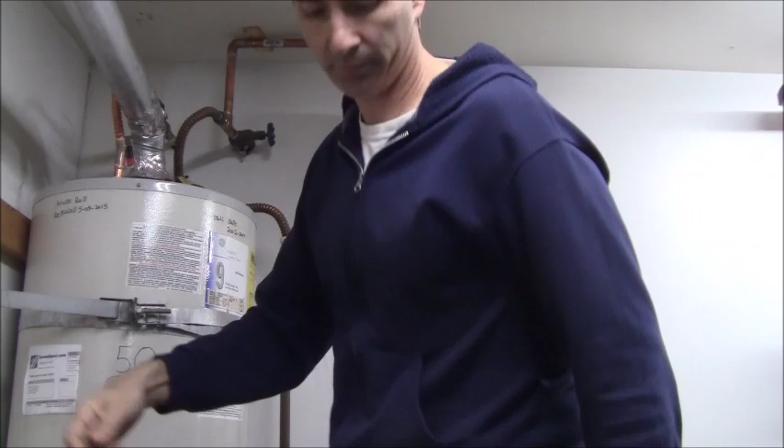Actually, you know what we could do? For the first test, we'll do it without the tank. Leave that shut. So for the first test, we'll test the thermal expansion bypass at the regulator, make sure that works. But I've got my hot water heater on. I put this back to the thermostat setting here, back to hot. So what I need to do is open up a hot water valve and get this thing fired off. I'm going to do that right now.

Okay, I've got a hot water valve opened up, and you'll see that I'm dripping out of here. That's my pressure temperature relief valve. On my particular heater, because it's so old, this thing has an install date between... Oh, that thing just fired off. Let me go shut the water off. Okay, this flame is on and that valve is closed.

Let's go outside and check our pressure. Okay, so from the city side it's 110, and on the other side it's about 75 psi. So let's see what happens now, because there's no thermal expansion in the house because I shut that tank off. So what should happen is that this pressure here should come up due to thermal expansion. We're going to test that right now and see what happens. I'm going to give it a few minutes.

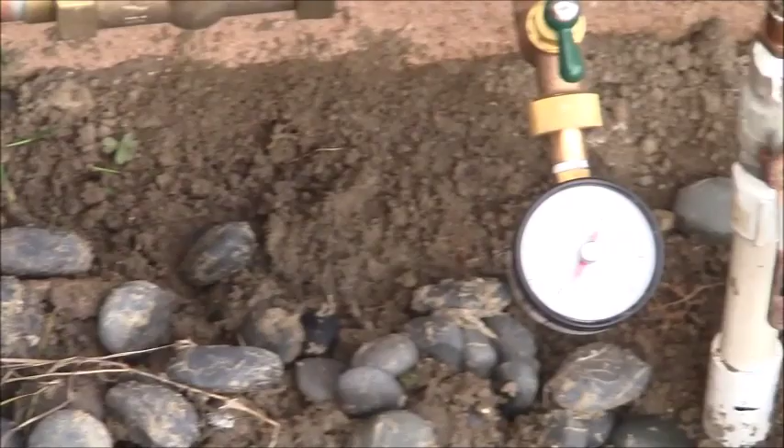Okay, it's been a few minutes. We're at about 85, 86 psi. The hot water heater still fired off. Alright, it's been a few more minutes. Hot water heater still fired up. And you can see we're at 100 psi on the house side of the pressure. Your city pressure coming in is about 110, 111 psi. So we still haven't used any thermal expansion bypass of that valve.

It's just heating, just building up the pressure on the house side. This pressure has to exceed this pressure over here in order for it to utilize the internal thermal bypass of that pressure reducing valve. So this has got to get over 110 psi. It has not done so yet, so we're just going to sit here and watch it. It's got about another 6 psi to go, so we'll give it a few more minutes and see if we get there.

Okay, we are finally at 110 psi on the house side. So you've got 110 psi on that gauge, and you've got 110 psi on that gauge. So now we need to monitor this one and see if that pressure begins to stop rising and settle out. If that's the case, then the thermal expansion bypass of the PRV valve right there is going to be taking place, and a small amount of pressure is going to be going from here back into the city to alleviate this pressure.

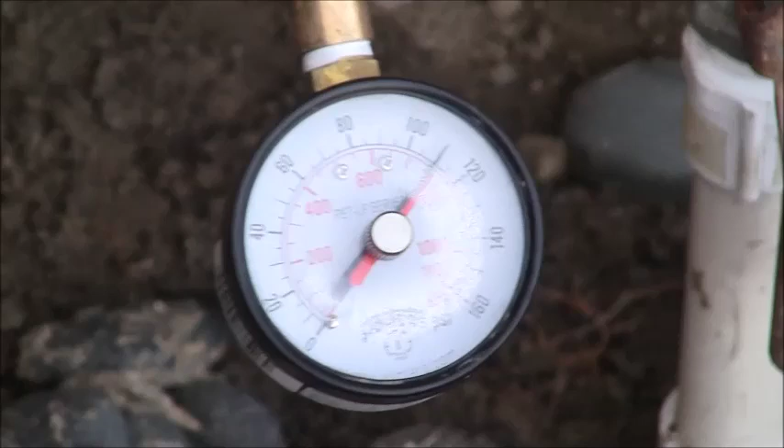That's called thermal expansion. So we're going to keep monitoring this. I've got my red needle on there also to watch it and see exactly what it's going to do. So right now you can see that we're okay at about 110 psi.

Somebody must have used hot water in the house. I forgot to tell them not to use the hot water, so it messed me up. I'm going to have to start the test all over again.

Okay, so I had to start the test over again. Right now I've got the expansion tank shut-off valve shut and the hot water heater fired off, so it's building up pressure. While I was out here observing everything going on,

I actually saw a drip dripping over here down to the ground. I thought maybe it was this bleed screw, because you can see a little bit of water on it. But looking closer, it's not the bleed screw, it's actually a joint up here. I'll show it to you.

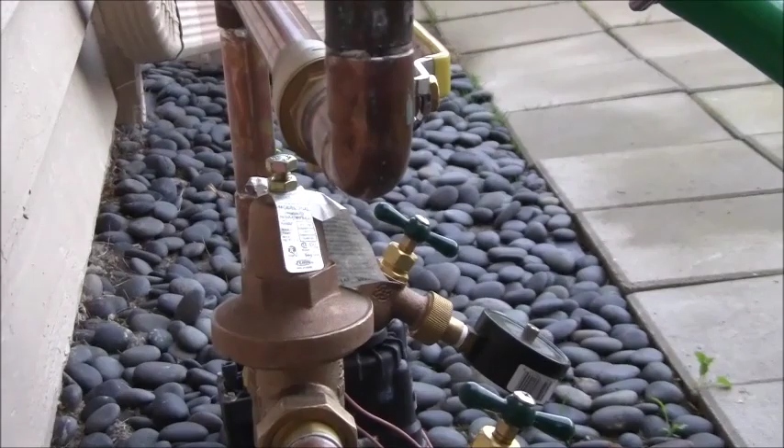Alright, so here you can see some water at the bottom of that elbow, and right on the back side of this thing - oops, that got me a little bit of a seeper. Well, I've got to resolder that joint, but right now I don't want to resolder it. I want to get my testing done.

So I'm just going to continue with the test. Right now I got all the way up to 110 psi before the test got canceled because she used the hot water. Alright, so I just have to wait now until this thing comes back up.

Okay, we're getting up to the point where the test got canceled last time because the water was used. We're getting right back to that inflection point, 110 psi. Let's just see how much higher we go. I just have to give it some more time.

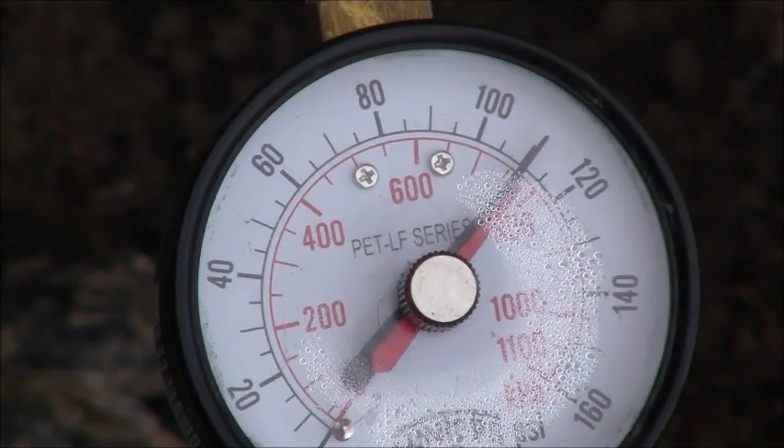So that's the house side. Over here is the street side, 110 psi, and this is the one we're watching to see what it's going to do. So we're about at 111 psi. Alright, so we're just going to monitor that.

I'm going to give it a few minutes. Let me go see if the hot water heater is still fired off. Hot water heater is still fired off. We're at 111, 110 psi.

I'm going to say the thermal expansion is definitely working because the pressure is not exceeding that - 110 psi there, 110, 111 psi. So it's about one pound over when the thermal expansion valve kicks in.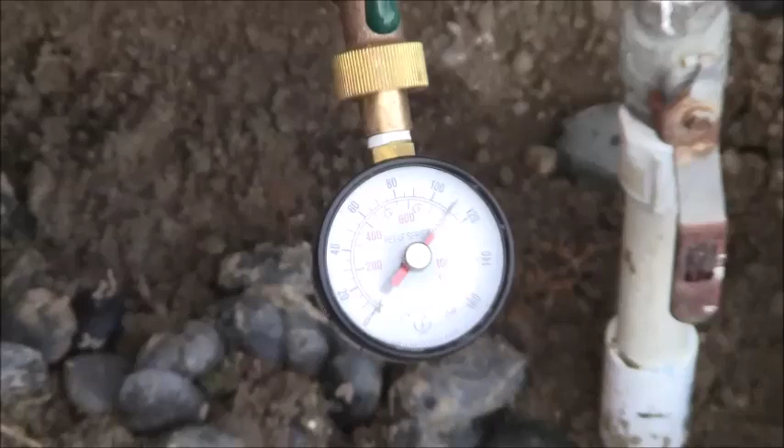But what I'm going to do is keep the test active until that hot water heater completely shuts off. Okay, we just shut off. I'm going to go outside right now and check the pressure.

Alright, so here you go. You can see I've got my red needle seat on there, so we know that we never exceeded about 112 psi. So the thermal expansion bypass of that valve is working properly. Now let's put down our pressure as 112 psi.

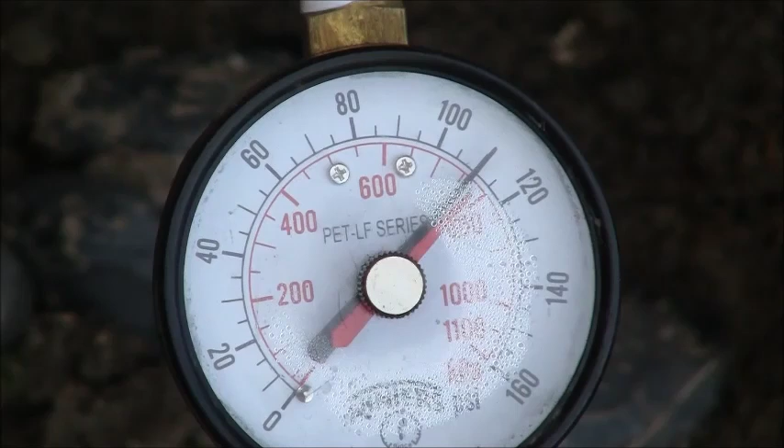Alright, so without the tank, the thermal expansion pressure is 112 psi. Now I want to do it with the tank. Before I open up that valve up there, I want to bleed off this hot water pressure and get it back down to 70 psi. Let me do that.

First thing I'm going to do is open up the hot water valve right there. Let me check the outside pressure. The outside pressure has dropped off dramatically, so now I'm going to go ahead and open up the valve to the expansion tank by the hot water heater.

Okay, now I'm going to go ahead and open this up, which we already know is set to about 72 psi. So now that we've done that, that tank is back in service.

Okay, the hot water heater is fired off. I'm going to shut the water off right now. So I've got the water over here - shut that off. That water's off.

Okay, so now with the water off, we can see what the pressure is going to do on the system. We know last time it went up to 112 psi without the tank. Now we have the tank on - let's see exactly what it does.

Right now we have to leave the system alone and let the hot water loop heat up until the hot water heater is satisfied. I can hear it, but just to give you YouTubers a visual, there's your flame right there - you can see that's still on. So now I'm waiting for this flame to get satisfied and shut off that thermostat, so this way I can see what the pressure is.

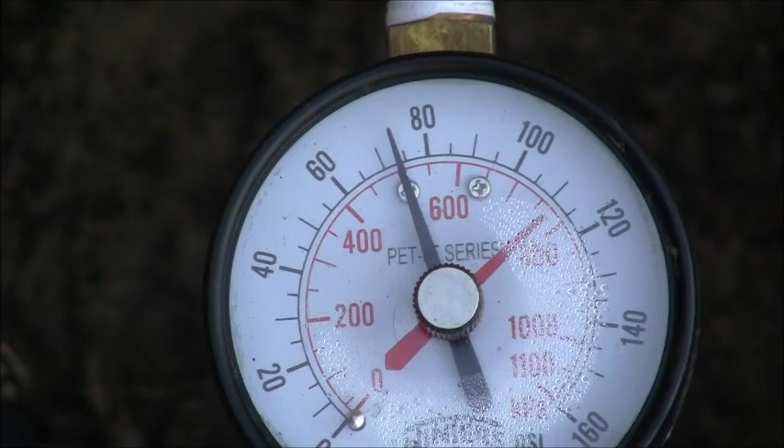It's about 74 psi, and it looks like it's probably not going to go higher than that, but I'm still watching it to see what's going on.

Street pressure is 110 psi, and boy, I better make sure I got that valve open. Yeah, it's open. Everything is open here. So this way I got clean pressures. All my valves are open 100%.

Alright, so I got to just keep an eye on that while I'm waiting, because it takes almost 20 minutes for that hot water heater to satisfy.

I just got my wire wheel and got my heat, some solder, and some flux, so I could retouch this joint. And then I went around and cleaned it all up, so I can drain the system down once I'm done with this test. So I just got that joint ready to be touched. But for right now, I want to finish this test.

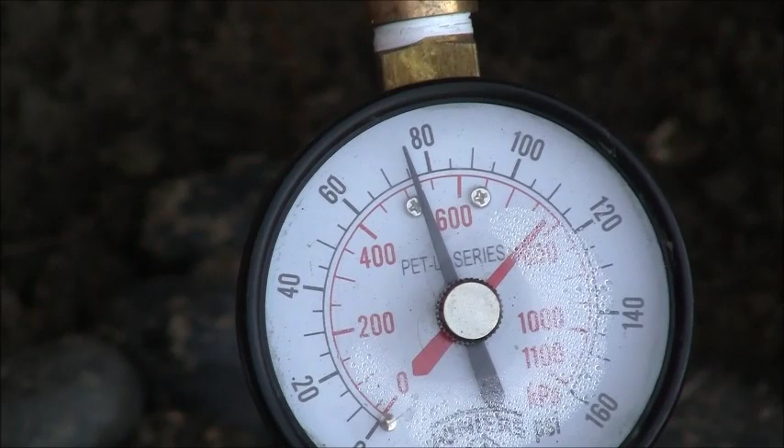Okay, thermostat just shut off. Let me go outside and check the pressure. 75. Okay, so you can see the huge difference here when you have the expansion tank. Instead of going up to about 111, 112 psi, you stop at 75.

So let's go write that down. So with the tank, 75 psi. Originally, we were at 115. This is just a guess column, so you really can disregard this column. The real numbers are this column and this column. Alright, so let's go through it.

Okay, so when we first started out, we could not tell our street pressure. I could only guess at it because I didn't have a pressure gauge on the street side. Now I do. I know what the actual street pressure is. The house static pressure was at 110 psi. I've got that reduced down to 73 psi.

So under normal resting conditions, the pressure of all the pipes within the house is 37 psi less than what it was. So it's a little bit less stress on the entire house, which is a good thing because of the copper in the slab of this house. The lower that pressure is, the less likelihood of a slab leak.

Perfect example is that joint that when I was doing my thermal expansion test without the tank and I brought the house pressure up to 112 psi, under normal conditions, in that joint that I showed you was a seeper, that one was not leaking at 73 psi, but at 112 psi, that joint was leaking. So that was like a weak link that hopefully I can fix. So that'll be my intention following this video.

Okay, so house static pressure, I was able to reduce that. Now, that wasn't my goal. It was not to raise my pressures on my flows going to my house, because I was perfectly fine with those flows. Quite honestly, I was fine with 60 psi.

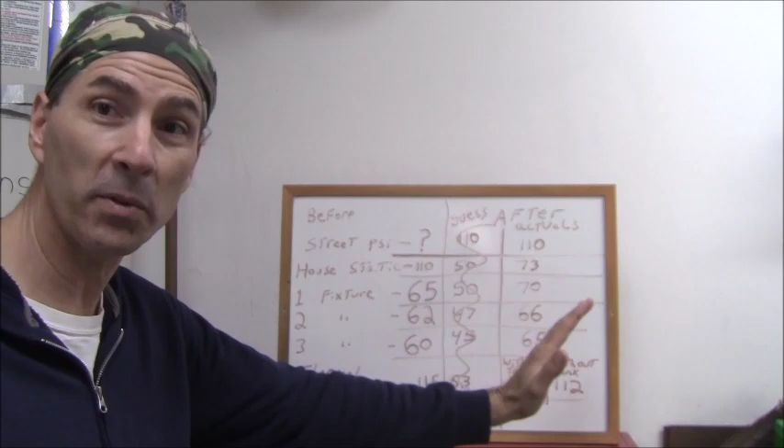This was raised because of an irrigation problem, because the zone was incorrectly designed. So because of an irrigation design problem, and the same backflow preventer is feeding the house as well as the irrigation, that is why that pressure is 73. Otherwise it would be at 60.

Okay, now how much difference does this tank make? Okay, and how do you test that tank and what's going on with that? Now you know exactly what that tank does and how to test it and to determine if there's any problems.

If you don't have that tank, if you don't have an expansion tank like that on your cold water side of the hot water heater, your thermal expansion is going to go up, in my situation, to 112 psi before the thermal expansion bypass of the pressure reducing valve that I just installed bypasses and goes back into the street, which is what it's designed to do.

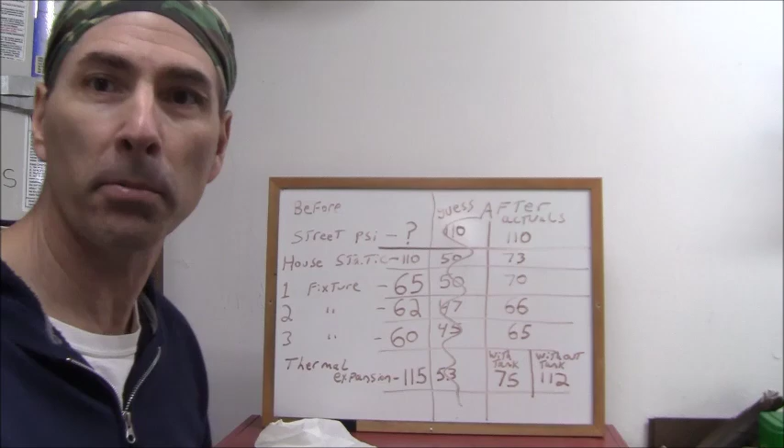That is working properly. If hypothetically, let's assume that my thermal expansion bypass on my brand new valve was not working properly, what would happen? Over here at my hot water heater, this line right here is connected to the P&T pressure temperature relief valve set at 150 psi. The pressure from the thermal expansion will go up to 150 psi, and then you'll drip out of this line and relieve the pressure that way.

So if you have a leak, if you don't have one of these tanks, and you are dripping out of your pressure temperature relief valve at the bottom, that's an indication that the thermal expansion bypass feature on your pressure reducing valve, or however you are taking care of thermal expansion at your property, is not working properly, and you're relieving that pressure out of your pressure temperature relief valve.

Do you want to do that? No, you don't. Generally, the pressure temperature relief valve is just an all-out safety feature indicating that the thermostat on the hot water heater has run away from you.

The flame has come on. The pressure in the tank and the temperature is getting to the point where it's getting dangerous, like a bomb, and then it's supposed to relieve out. It's not meant to be used to take care of your thermal expansion, so please don't use it in that regard. But if you see it leaking, that's an indication that something's wrong with my plumbing system. I need to investigate.

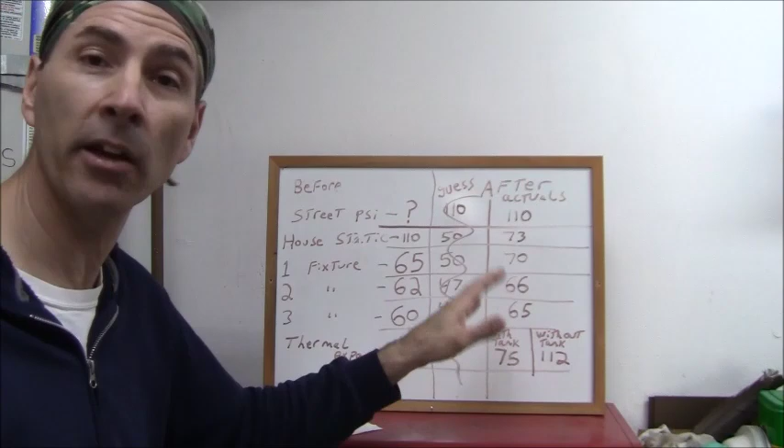This way I know all of my variables. The only way that I could possibly fill in this chart accurately is to do it with the system that I designed. Generally speaking, that's why I designed it and did it this particular way.

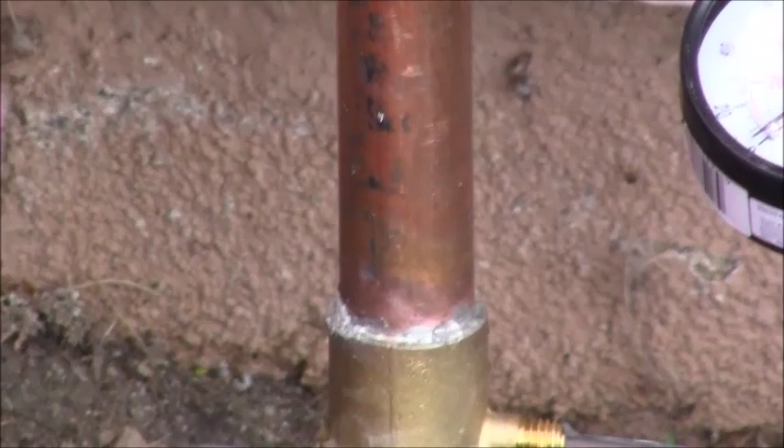I got all the pressure inside the house relieved. Let's open this up. Okay, that's good. Now I'm going to open up this bleeder port here. Put that bleeder screw up there. That was one of the nice things about installing these valves with bleeder ports, is that I have other ways I can relieve pressure. I do have valves here I could remove, but this is at the lowest point in the system, so this is going to take care of all that water pressure. Once that's down to zero static, I know that joint right there won't have any water in it. So let me let that drain out.

While that's draining, I'm going to leave this valve open here. I only want to heat up this joint and retouch that, and I don't want to destroy a couple of things. I don't want this getting destroyed, so I'm just going to put a sock wrap on that, and I also don't want this valve getting too hot, so I'm going to put a sock wrap on that one too. That's just to keep the temperature out of these two valves. I don't like to heat up my valves.

Pressure down here is down to zero. Let's start heating this joint and see if we can't get it soldered up. We're good to go. This paste brush is ready with some flux on it. I've got my heat, I've got my solder, and we're going to get this good and hot. The seeper was in the back.

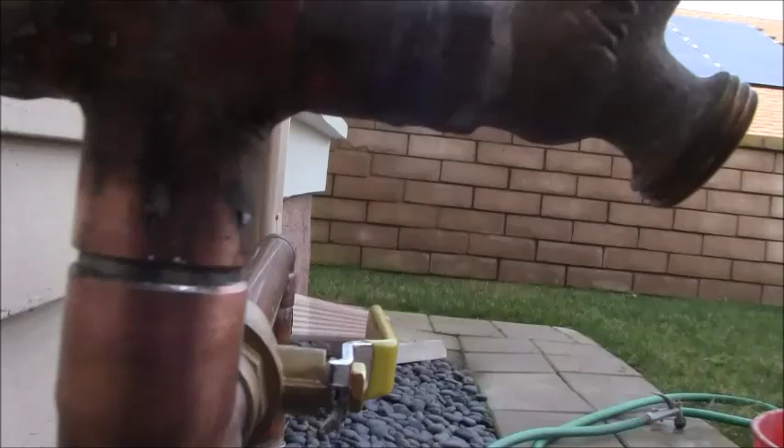I'm looking for the seeper leak, and I don't see it. So who knows? I don't know. I was ready to fix something here, but I can't see it. If I can't see it, I can't fix it.

I'm going to monitor it. Like I said, I don't have acetylene with me right now. If I have to, I'll get acetylene and get that pipe hot enough. I couldn't get it hot enough with this product, MAP gas. I just couldn't get it hot enough. I could tell by the way the flux wasn't bubbling up. When you get your pipe good and hot, flux bubbles up nice, and this wasn't doing it. So I didn't feel confident about that, and I'm just going to monitor it.